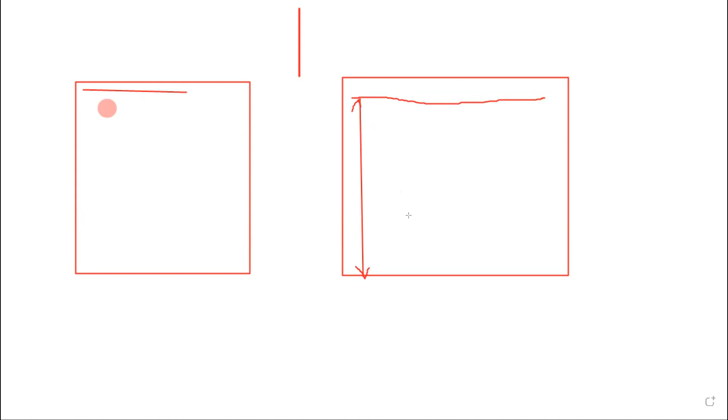So in this wall, for example, again I'm giving you, here is the water closet, right? For example, here is the water closet. The pipe is going in the above level. So if you want to connect this water closet to the above pipe, how we can able to do in our house? Generally, what we do, like this, right? We will connect like this, right? Is that no? Yes, sir, okay, fine.

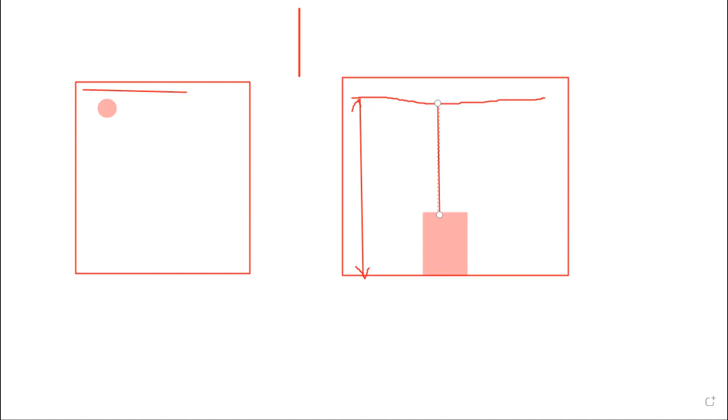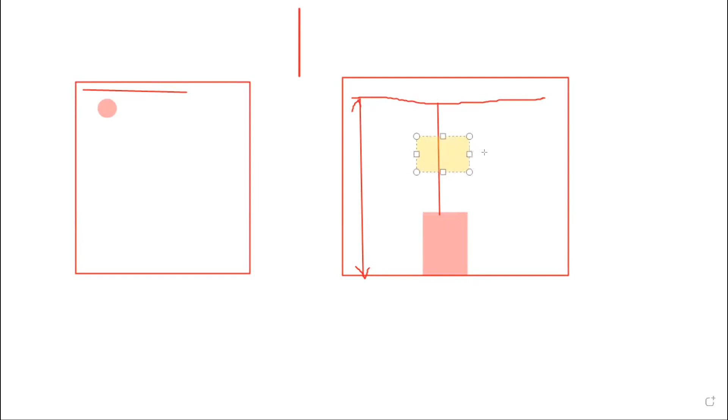What if in between these two, if I'm having some other obstacles, like a window? It could be a beam, it could be other a pipe, or a window. Okay, yeah, window. Then how I can able to do like this? So we need to change the direction of the pipe. So how I can remove these conflicts? We need to add, put elbows.

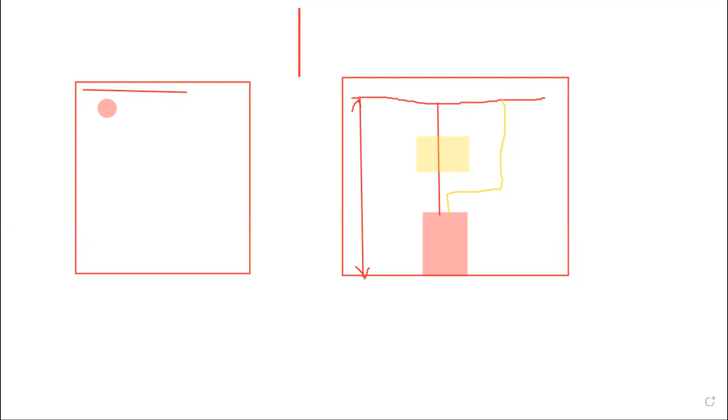Okay, so what if I took the connection like this? Now I can able to avoid this conflict, right? Yeah, but it's like this one is the only option. Right now, this one is the only option. Okay, fine. Can I give another example? I mean, another solution to this conflict. Yeah, sure. So for my case, what I'm going to do means I just make the elevation of the pipe up to here. Yes, please mute yourself if you don't have any questions.

Okay, so I just make my pipe elevation just below my window, and after that, what I'm going to do, I will just make again a connection up from here to here, right? So this is also one of the solutions, right? But what is the difference between this solution and this solution? Second one is not practical. No, it's practical, it can be done. This is also practical, we can connect more practical pipe.

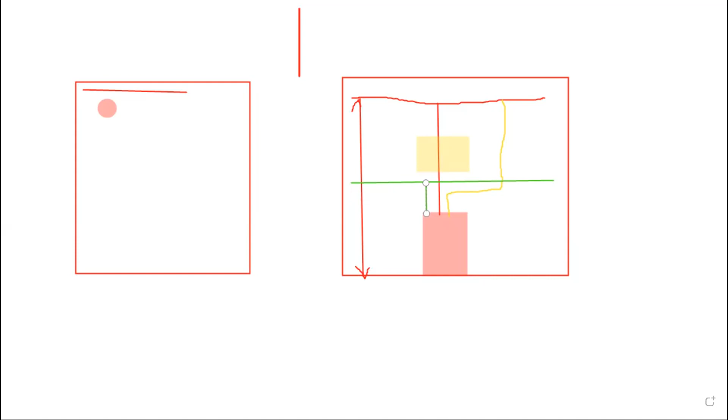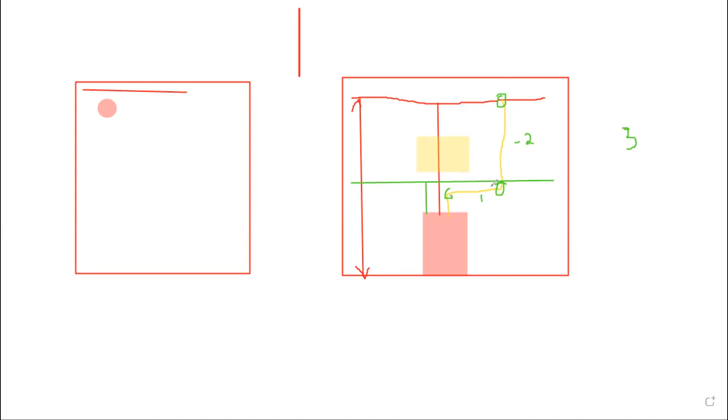What actually happening here? If I'm using the first method, what actually happening? Here I'm making one elbow, one fitting, T-fitting. Here I made one elbow. Here I made one elbow. There are too many joints: 1, 2, 3. Three extra fittings I used. For example, here 2-meter pipe, here 1-meter pipe, here 0.5 meter. 2 plus 1 plus 0.5, 3.5 meter pipes I used. Right? But here I just take one fitting, and within less than 0.75, you can say 0.75 pipe I can able to connect. So which is cost effective? So this one is more economical than this one.

Like the previous one, what is the purpose of BIM? Cost cutting, or cost effectiveness. Ultimately cost cutting. At the end of the day, everyone is working for money, right? Yes.

This is the reason, and this is the difference between designing and modeling. Now I believe you guys understand the purpose of a modeler. In the 3D model, that portion should be checked with each and every service, even ACS - architecture, structure, construction. If some people say conflict means only service to service, like HVAC to other services, water supply, drainage - no, you should check with architecture also. This is one example. They will check with other services, whether it is clashing with duct or firefighting pipe or everything, but they don't check this. So this is generally termed as value engineering.

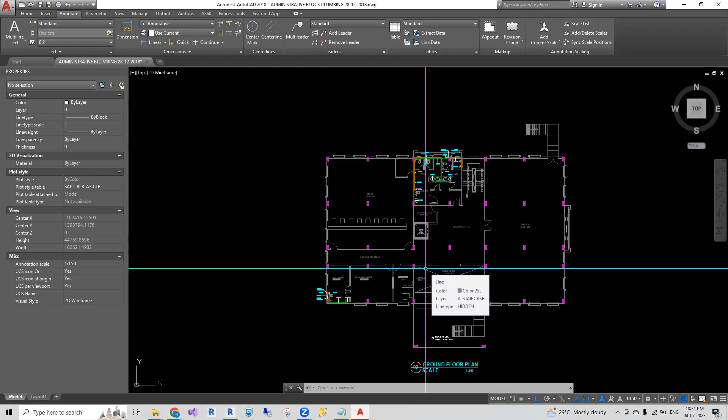So sink, as here they are placing sink as a block, water closet as a block, hand shower as a block, flush button as a block - all these things we can put in Revit as a family. Is that clear to everyone? Yes sir, okay fine.

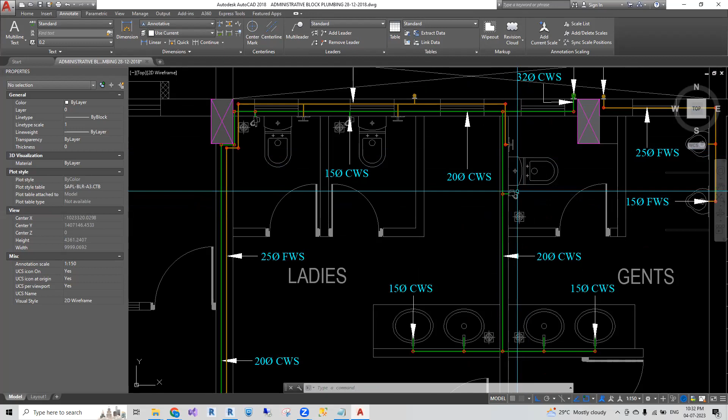For example, this is the project I am supposed to work on, right? This is the actual file I'm supposed to work on. I'm keeping this file in some folder which can be accessed by all the employees of the company, the networking server folder, right? So that folder will be accessible to each and everyone from the organization. This is the file, I'm placing it somewhere on the networking location so every employee of that company can open that file.

So this is the AutoCAD software. This is my project, I open this project, and I'm going to work on this project. So for example, here I'm going to work on water supply. For the same building, one of my colleagues wants to work on drainage. Until or unless I close the file, can he open the file or work on that file? Is that a no? Can I get a yes?

It gives a warning because another user is working on it. If I open the project, and at the same time someone else from my organization tries to open it, he can open it, but it will show a prompt that the file is in read-only mode.

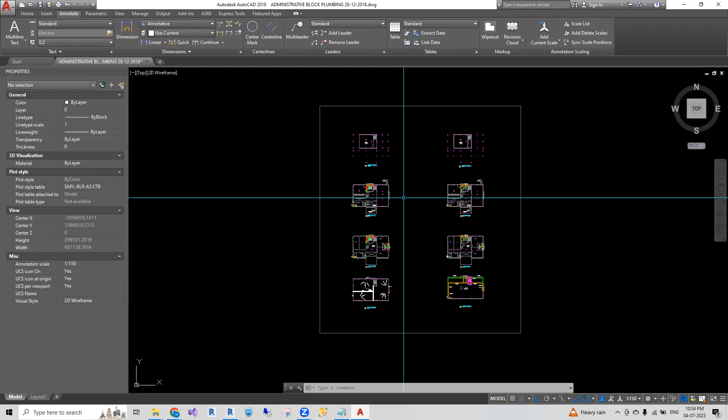Correct. This is one main disadvantage in AutoCAD, and to eliminate this issue, Revit has an added advantage called the central file system. Everyone can work on Revit, but people should be aware of what is a central file, what is a local file, and all the other related things.

If you just search Revit, they will open it and show what button does what or how to make a line. That's not the real issue, you can learn those things from anywhere. Why I'm telling you all this is because this is the way you have to work, then only you can do your project in a very efficient way.

So the first one is the central file system. What is a central file system? In one file, many people can work. It has to be connected with a LAN network, where we make a central file and multiple people can access that file, and we have to synchronize every 15 to 20 minutes to reload their work.

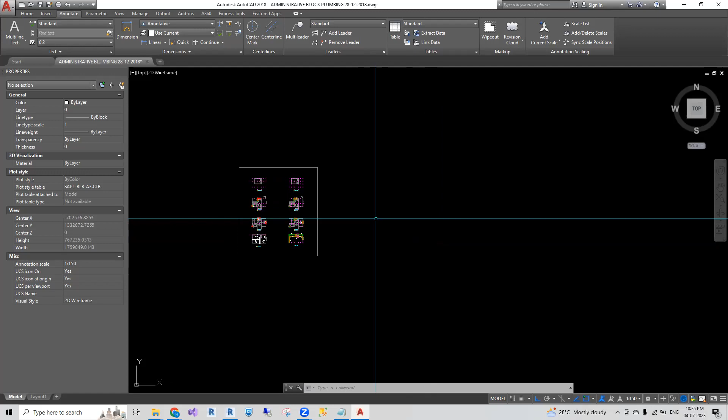That's the modeler's role, right? Yes, Shubham. Okay, fine. So as Shubham told, that is the scenario. My next point is how this entire process is going to work for you.

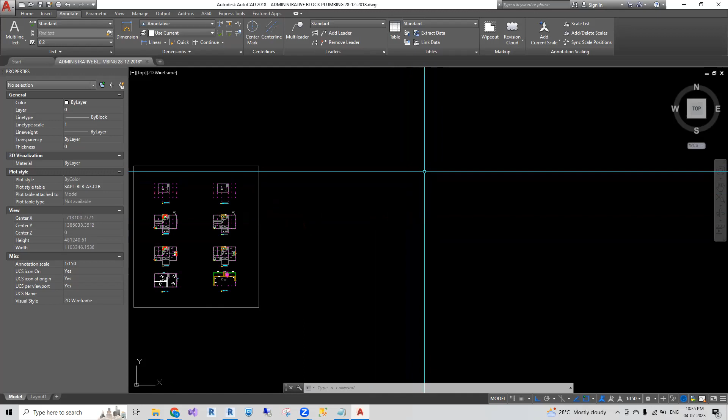As I told before, for example, I have some project. Initially, what I have to do is put it in some networking location so everyone is able to open that file. So I'm creating one file in the central location. I have 3 colleagues who are going to work on that project.

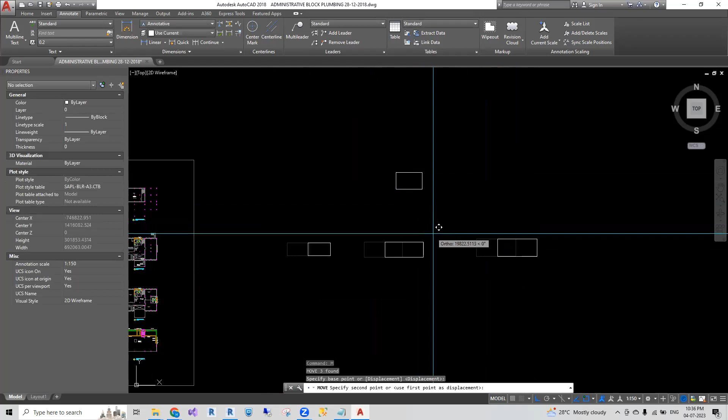A, B, and C. So now all these colleagues want to work on that project at the same time. So for that, what I'm going to do is keep that project as a central file. So all 3 of these guys need to create a local file.

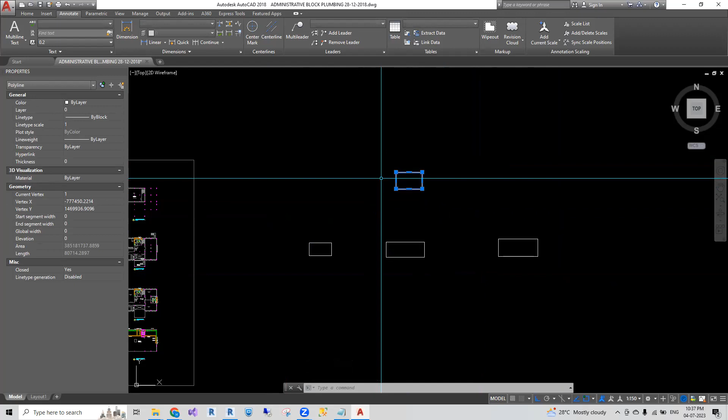So what is meant by a local file? A local file is nothing but a copy of the central file. This central file they will keep on the networking location, meaning somewhere on the server. A local file means somewhere on their own PC, on their own system.

So local file means on their own system, either on the C drive or the D drive, whatever it may be. Central file means somewhere on the networking or server location. Local file means on their own system, which is a copy of the central file. So there will be a connection between the central file and the local file.

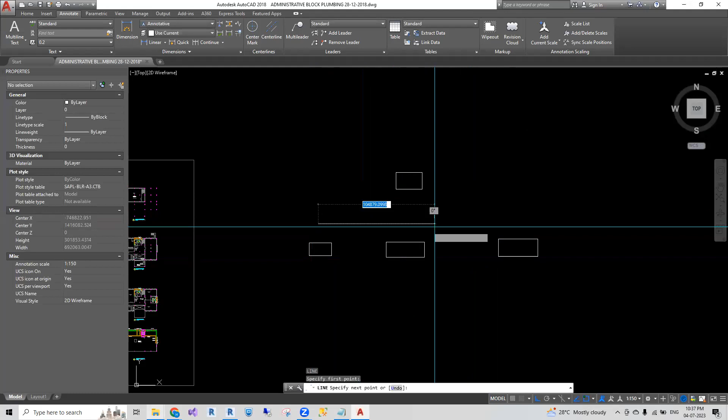So every member who is going to work on that project will create a local file from the central file. Is it clear, guys? Okay, so now I have one central file and 3 local files, because I have 3 people working on that project. As I told before, there is a connection between the central file and the local file.

So this is person A, he is doing some work, like he created some work like this. And person B has created some work like this. Now person A wants to update his work in the central file. What does he have to do?

He has to sync the local file to the central file. Initially, they need to create a local file, I will tell you how to create a local file in some other class.

But once he has created a local file, he needs to open the local file every time, not the central file. He should not touch the central file. First step, he needs to create a central file. Then he needs to create a local file. Once the local file is created, it will create a local file on its local system.

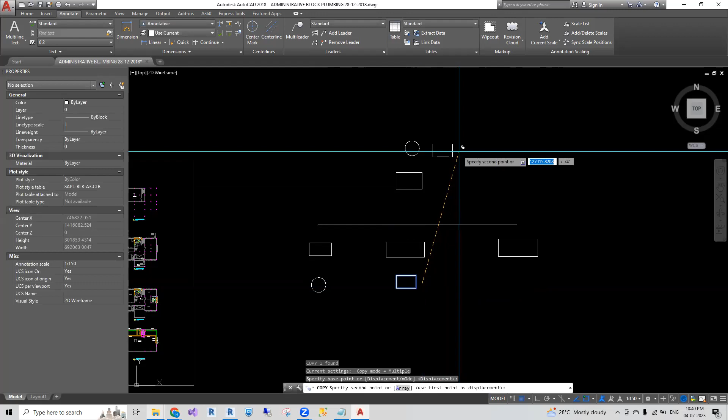What actually happens whenever people do synchronization: whatever work done in their file gets copied into the central file, as well as whatever work is there in the central file, it will come into their file. Is it clear?

What is the difference with synchronization? Whatever work done in their file will update into the central file, as well as whatever work done in the central file, everything will get updated into his file.

Now I'm telling you two topics: synchronization and reload latest. Now you have to consider reload latest. So what is meant by reload latest?

This is person C. He is working as a supervisor or team leader or BIM manager. He doesn't want to work on that project, but he has to know what is the update in their project. So what you have to do, you have to give the reload latest.

So whenever he gives a reload latest, whatever work done in the central file will get into his system, but whatever work done by his system is not able to get into the central file system. Is it clear?

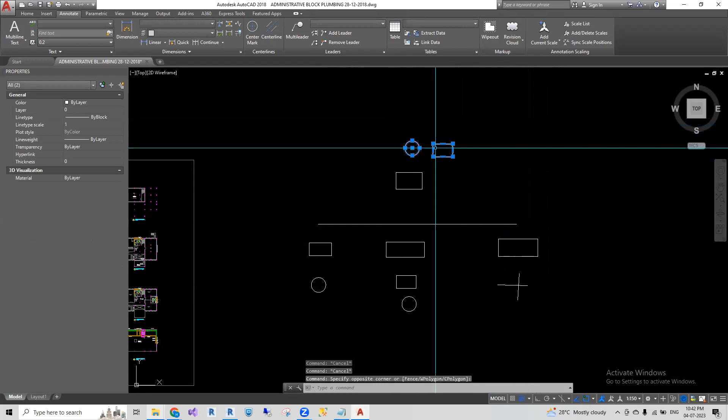So whenever he's going to give the reload latest, only the work done in the central file is capable of getting into his file, but whatever work done from his side can't update into the central file. Is it clear?

Now I believe it's clear. It's like read only for him. So whatever work done in the central file, that only you can get into your file, not your work. So we have two terms: synchronization and reload latest.

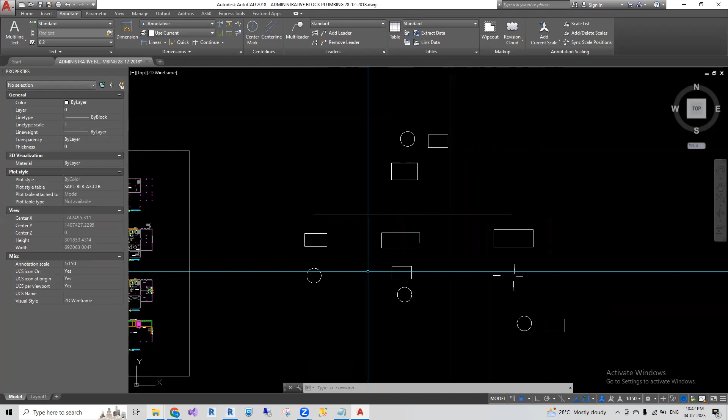Synchronization means what? I'm telling you again. Whatever work done in your file will update into the central file, and whatever work done in the central file will get into your file. Synchronization means what, reload latest means what: whatever work done in the center file will get into your file, but your work will not update into the center file.

If you are going to work for any project or any organization, you should know these things. This is how Revit works. Is it clear? Yes, yes.

Okay, fine, I'm opening my Revit screen. Oh my god. File. I forgot to clear my temp files.

So I'm asking you guys, everyone, I believe you installed the Revit software, right? Yes. I can't see anything, is there anything? Yes. Nothing happened, thank you.

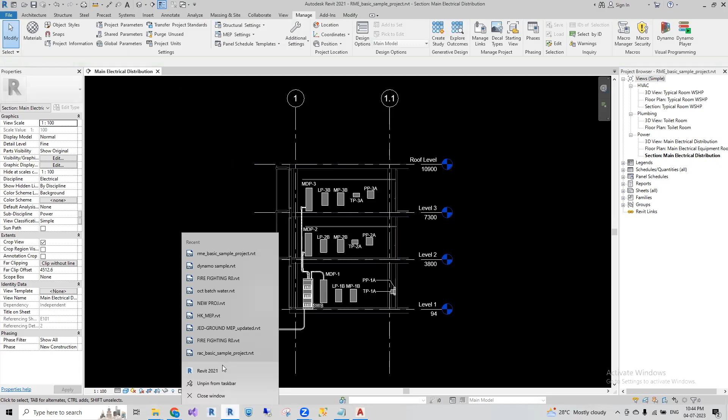Come on. Guys, I'm asking you, everyone installed the Revit software, right? Yes, installed, sir. So everyone cracked that one, right? Obviously yes, I have a student version.

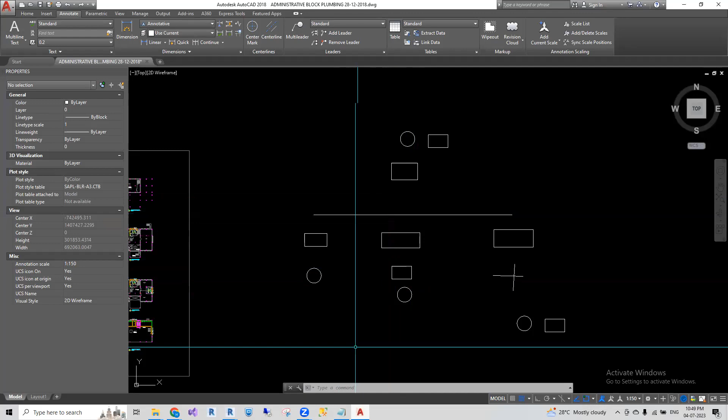Then what is meant by 'detached from central'? As I told before, whenever you create a new local, there will be a connection between the central file and the local file - from that connection only, synchronization, reload latest, everything happens. Detached from central means you are breaking that connection - there will be no connection between the central file and the local file. Just for viewing purposes, you can use the Detach from Central option.

Is it clear, guys? Okay, that's all from today. Tomorrow we meet again, and we will discuss what is meant by ownership and relinquish all mine, and what is a template and the types of Revit files.

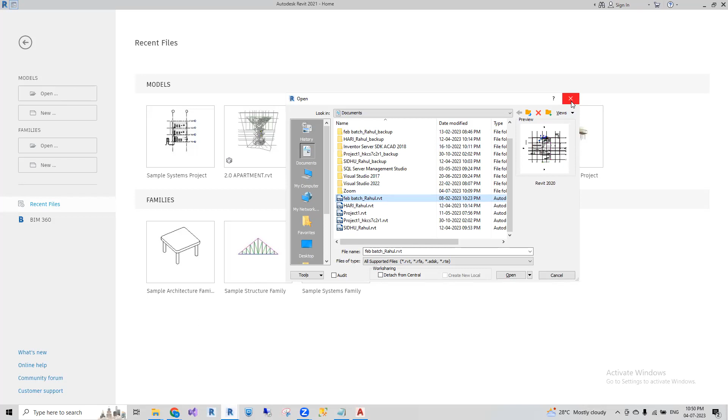Okay, what is the full form of Revit? Oh my God, I believe people expect this question, right? So that is homework for tomorrow - what is the extension for Revit, and what are the types of Revit files we are having? What is the extension of an AutoCAD file?

DWG. What is the extension of Revit? RVT - not only RVT, we have some more types also, for template, for family, there are different types. You should not answer next time - only answer when I'm asking you particularly, otherwise let the rest of the class answer.

So tomorrow's homework is you have to find the abbreviation for Revit and what are the types of Revit files we are having, and their extensions, right?